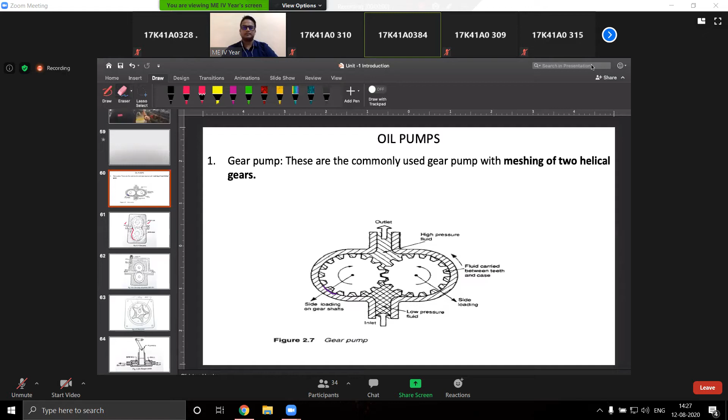Detail internal one first. Low pressure created at inlet wall, so suction can be done here. As suction is done, these liquids are passed over the teeth, in between the teeth of gears, and passed over the peripheral circumference of the outer walls, I mean internal walls of the pump casing, and just pumped outside from the outlet.

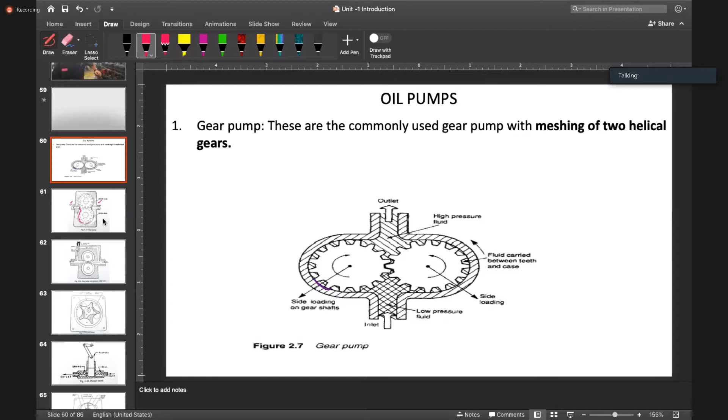Now this is also a gear pump with a pressure relief valve. What is the role of a pressure relief valve? Whenever on the outlet side you have excess pressure than the required value, then it will release the extra pressure by sending the oil from this side, and it will bypass it to your inlet side once again. Now how it will bypass, this is the question.

Any other student? Right now it was Rahul Gandhi, na?

Some other student, tell me how this bypass and this spring pressure relieving valve with the ball valve is working? Simple basic physics: that spring is loaded up to a certain pressure, sir. If the pressure exceeds at the outlet side, the ball will be lifted using the pressure and it will go into the inlet. Very good.

So every spring you have studied in your design of machine members, you have gone through spring constant or spring stiffness also. After a certain force, the spring will start deflecting. So when the pressure on the outlet side increases beyond a certain threshold value, this ball will lift up, and the excess pressure or liquid creating that excess pressure will get bypassed from this parallel channel, and it will come again back to your inlet side. So this is also a gear pump.

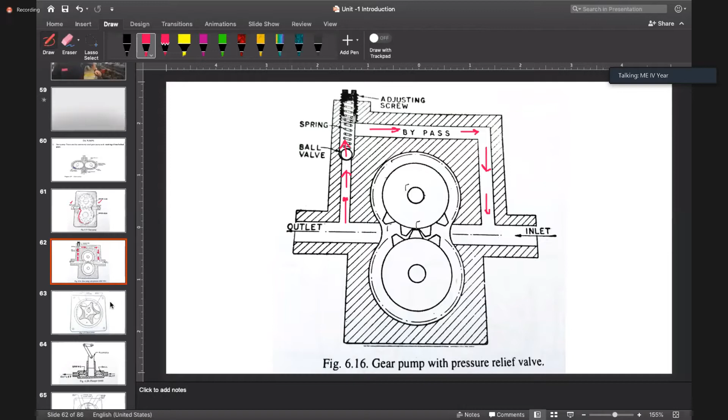Now another type of pump we have, that is our rotor pump. Now you are in your final year of engineering, all of you. By looking at this figure, who will explain to me the working of this pump? Some other student, I want everyone to participate in this discussion.

Sir, it's like a Geneva mechanism where the fluid is moved by the outer layers, as it has... when the upper layer, the outer inner part moves, that moves the pressure outside it to the next zones.

You can see the gapping. On the inlet side, the gappings are less, suppose it will be parallel, face to face. In between you will be having your lobes. This is your inlet port, this is your exit port. In between these two there are some gaps where your lobes are there. So what is happening, when this gapping is more, from there the suction of oil is being done. Now you can see the area is increasing, so more amount of oil will be sucked in.

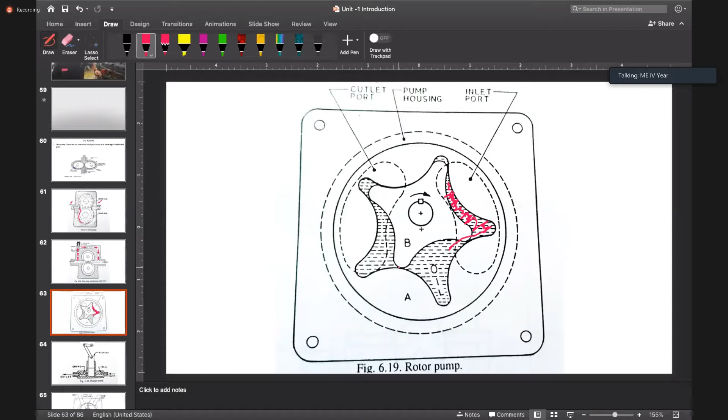And what happens if I am going to compress it? Compress it means I'm going to lessen the area. On this side you can see the area is being reduced, so it will automatically deliver oil with higher pressure. This is simple: you are just controlling the gap between two contacting parts. Wherever you have, suppose, oil in this much amount of area, and now you are providing only this much space for the oil to escape out, then definitely it will go with higher pressure. So that principle all these pumps are utilizing, whether it is your gear pump, and specifically I'm talking about this rotor pump also.

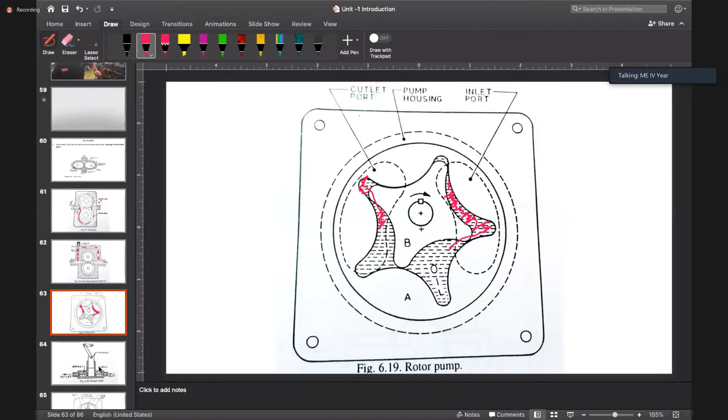Okay, so one last pump, no, we have two more pumps. This is our plunger type pump. Plunger you have studied in your fluid mechanics, so it is a reciprocating type of pump. Now, anyone who wants to explain this diagram, simple diagram?

One ball valve is there and that is controlling all the things. When the pressure is low in the cylinder, sir, the inlet valve is going to push inside and oil is sucked into the cylinder. So how is that low pressure created? By moving the plunger.

Yes, this plunger you can see here, all of you. This plunger is moving in the upside direction, so a low pressure will be created in this portion. When a low pressure is created on this side, what will happen? This ball will try to come onto this side, because here you have low pressure. And on this side also, this ball will try to move onto this side as you have low pressure over here.

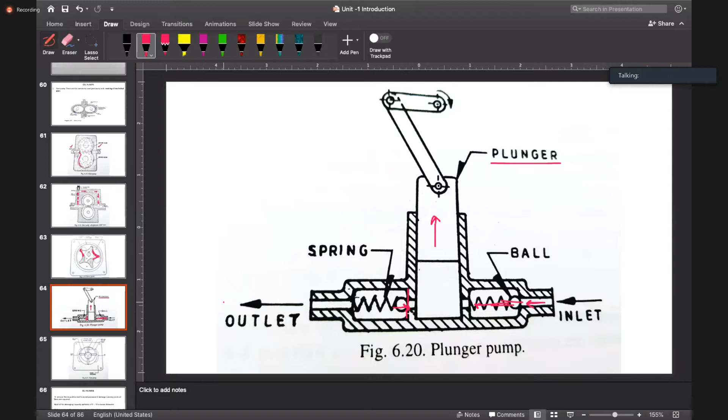So when this ball is not allowed to move inside beyond this limit, this valve will be closed, this passage will be closed, and no oil is allowed to move in from the outlet side. When this ball comes onto the left hand side, this inlet valve passage will get open, so oil will enter from this side into this chamber. When it is coming down, the reverse will act, this will be closed and that will be forced to open, so that pressurized oil will go from the outlet port to different lubricating parts. Is that clear to everyone?

Okay, so these are the simple physics behind all these working pumps.

Now we have one more type of pump, that is our vane pump. Who is going to explain the working of this vane pump? I have taught you two subjects, fluid mechanics and finite element method, and in those subjects I was more active. Now in this automobile subject, I want student participation, so this will be rather discussion classes so that more output comes from your side. Who is going to explain the working of this vane pump? I will help you, don't worry.

Anyone from the girls? Is there any girls in the class? Lateral entry? Yes, I'm waiting for the response. Anyone from the girls?

Okay, no issue. See what is happening here. You have two eccentric circles. The first circle is this outer one, and the second one is this inner one. These are eccentric, meaning their centers are not coinciding. You can see this is the first center, and this is the second center. This one is for the outer periphery.

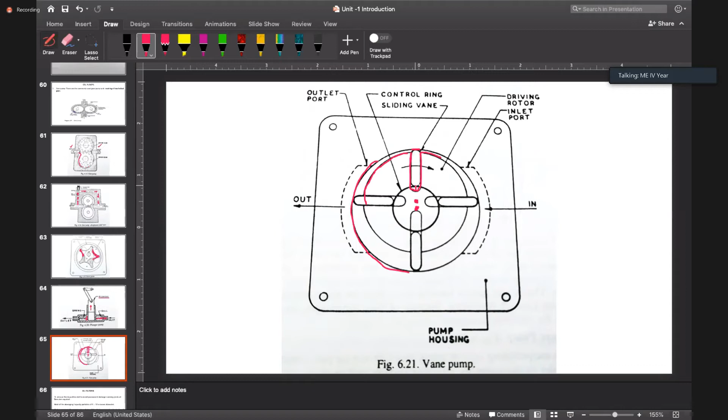So what happens with this eccentricity? Again, we are controlling this space, inlet and exit space. How are we creating the pressure? You can see there are some slots cut in the inner periphery, and some small piston-like thing is pushed to be in contact with the outer wall with the help of a spring. It's not shown in this figure, but some spring is there at every lobe, or vane. These springs push these small pistons, or sliding vanes as written here.

They are capable of sliding from the top level to the bottom level. Suppose this is the extreme position, so from here they can slide up to the inside portion. These vanes have the capability to slide inside that cut groove, and they are pressed to touch the outer periphery with the help of the springs. So this is how they are creating or pushing.

Suppose some fluid is over here, inlet is from this side, oil is coming in. Since this inside rotor is rotating in this direction, the oil that is sucked will move in this direction. You have studied in fluid mechanics, when the cross sectional area is changing, using your continuity equation, a1 v1 equals a2 v2. Do you remember that equation? Yes sir, continuity equation.

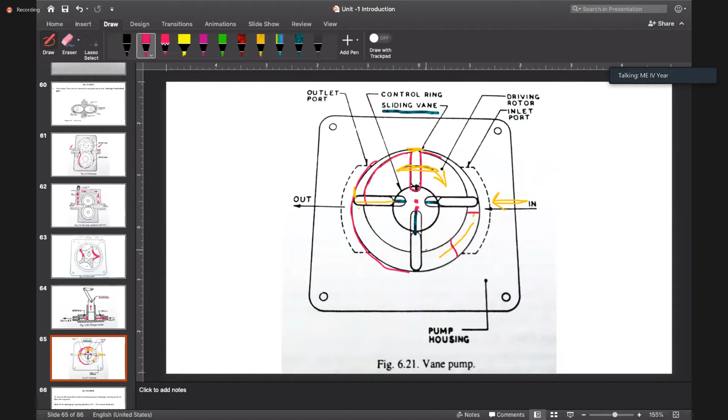So here you can see that the cross-sectional area is changing. If cross-sectional area is changing, there will definitely be some change in the velocity, and if there is change in velocity, you can apply Bernoulli's also. In simple language, it is pushing from this smaller area to get the oil at very high pressure. So this is the working of the vane pump.

Sir, you have shown one direction also. If the vanes rotate in the other direction, will the pressure not increase? Suppose this is your inside rotor, and it is rotating in this direction, meaning clockwise direction. So the rotor is rotating.

And if the rotor is rotating, these sliding vanes must have some weight. Got my point? So when something is attached to a rotating component and some sound is coming - can you please mute yourself? These vanes are attached to the rotating component, and it has some mass. So due to the centrifugal force, automatically that mass will try to move outside. This mass will automatically try to move outside due to its centrifugal force, and that force, along with the spring, controls it to maintain contact over here.

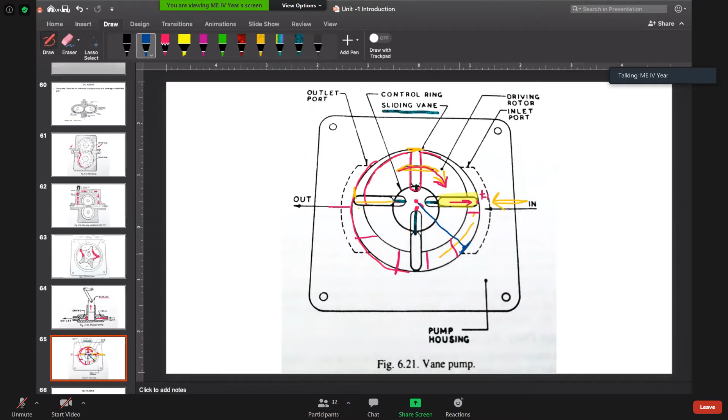At instant t2, your vane is coming at this location. So then what will happen? The spring and the centrifugal force will try to push that vane to the outer obstruction, or the outer limit, and that limit is provided by the case, as well as your spring acting there. So it will push the fluid coming inside, and it will push the oil to go in this direction.

And this is all that is required. You have to push the oil. Now from the larger area, it is moving toward a smaller cross sectional area, and from this side you have your outlet. So this is how the working of the vane pump is explained.

Is it now clear? It is clear, sir. Okay.

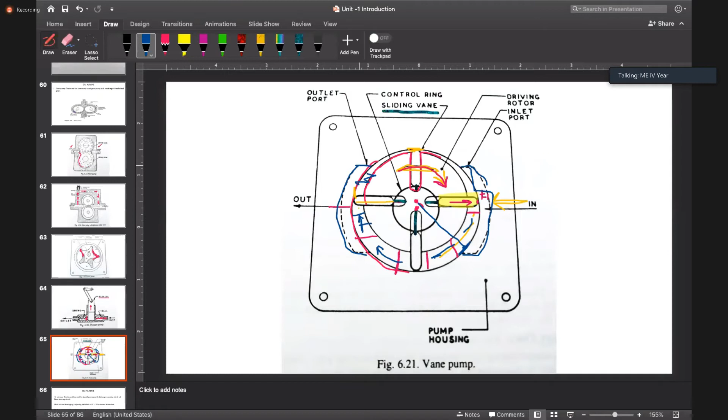Since these are schematic diagrams, here you can see the inlet port is showing from here up to here, and the outlet is also showing from here up to here. But in actual conditions, it is a little bit different. For understanding, it is drawn like that, but when you see the actual engine, it is a little bit different. When it comes to the smallest portion of the area, the outlet port is connected at that location, so that you can get maximum pressure.

I have one video to show you about how it is actually working, but I have not included it in this slide. I will show it to you, don't worry.

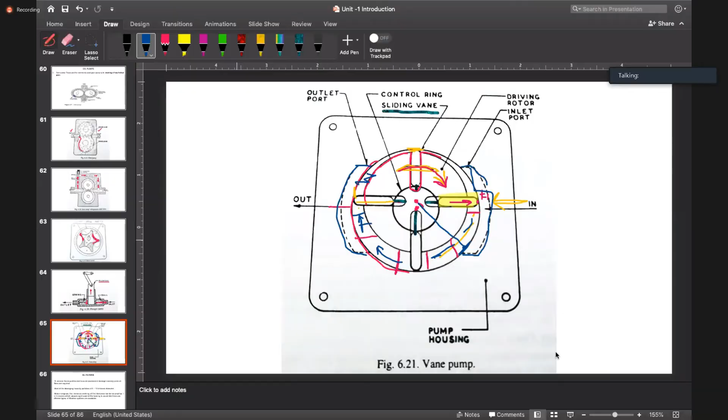Can you see the engine on your screen? Yes, sir, yes sir. Okay, now let's see how this oil pump is working.

Inside an engine, a mechanic will come and just break it, disassemble all the parts, show you and explain how it is working. So all of you please pay attention. This part is your filter and this is your pump, this location. Once you see the video, the picture will be more clear.

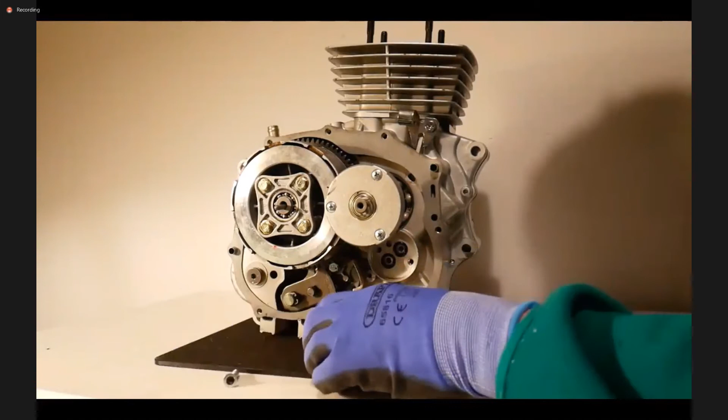Engine. So I've removed the clutch cover from this particular engine, and I've already removed the oil pump, which is just this unit here. It's secured into the engine with just two small bolts. And when it's fitted in the engine, it just slots in here.

I've removed the two securing bolts, and I'm able to remove the actual oil pump. So the oil pump itself consists of essentially three components. First, we have the driven gear, and this is the gear that drives the oil pump. The second component is the inner rotor, and the third component is the outer rotor. The inner rotor and the outer rotor are contained in this little metal unit here. I'll open that up in a few minutes so you can see what the inner rotor and outer rotor look like. This particular oil pump, with the inner rotor and outer rotor, is called a trochoid oil pump.

A trochoid oil pump is a very common oil pump to find on most motorcycles, and the reason being that it's very simple and also very reliable.

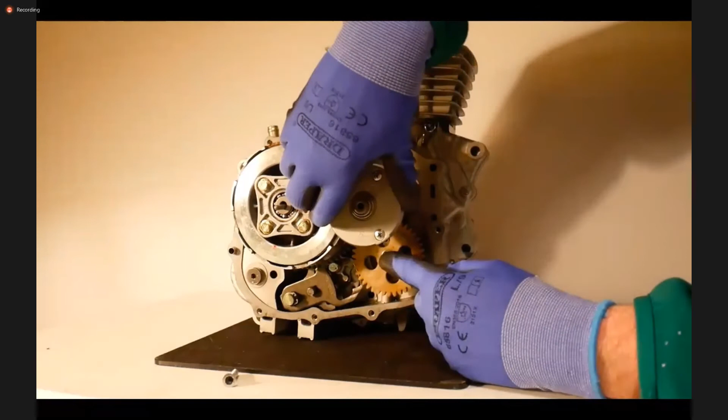So let's start by removing the driven gear. When it's fitted into the actual engine of the motorcycle, the driven gear is actually driven by the engine itself. So if I just hold it in like that and turn this, this is the end of the crankshaft. The oil pump driven gear is driven by gears hidden behind this oil filter.

So as the engine is running, the crankshaft is turning, and it turns the driven gear. The driven gear rotating acts on the inner rotor inside here, and it's the inner rotor combined with the outer rotor that actually pump the oil.

So you can see here the mating surface where the oil pump fits onto the actual engine, we have two little black oil seals. The first one here at the bottom on the left hand side, that is where the oil feeds into the oil pump. So this is the input, and this is the output.

This is where the oil feeds from the oil pump back into the engine to be pumped up through the engine. And you can see on the oil pump itself that we have these two holes, and they correspond to the input and the output. So the input is actually this one here, and the output is this one here.

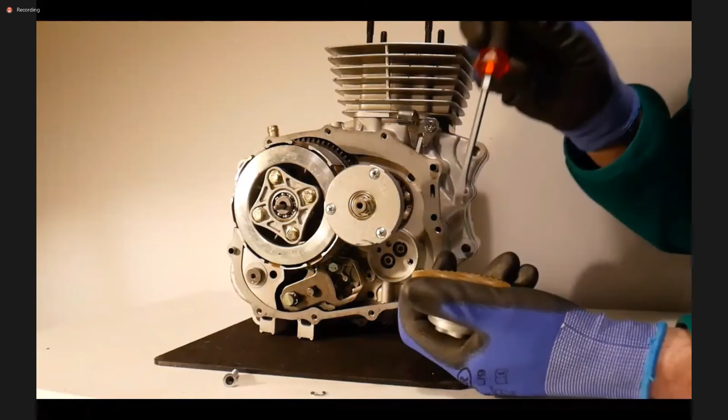So it's a tight fit. I can use my screwdriver again just to give it a little bang. Won't take much to knock it out. There we have our driven gear.

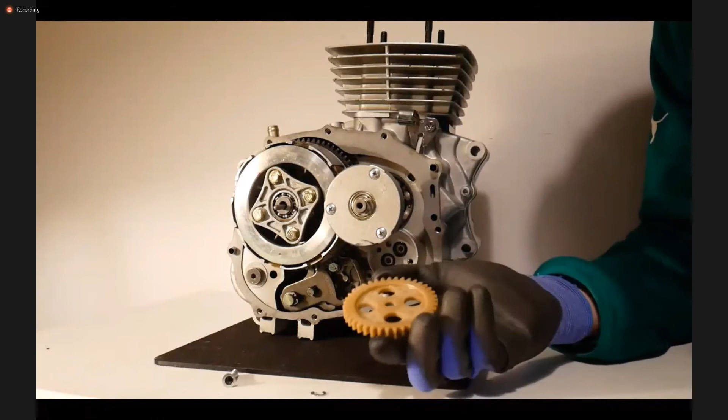As you can see, this particular gear is made of plastic. It's probably quite a hard plastic. The reason being, it's possibly the only gear in this engine that is made of plastic. The reason is that it's not going to be under huge pressure. All it's pumping is oil, so it's probably at a couple of bar pressure. So the forces on this gear are not huge.